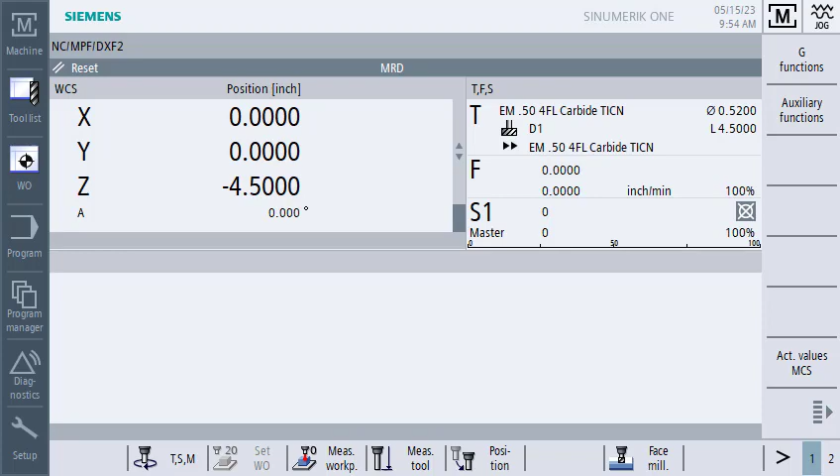Okay, let's program this part from a DXF file. We'll go into our program manager. I've already copied the DXF file in. So I want to create a new ShopMill program, and I'm just going to call this DXF. My block is already preset.

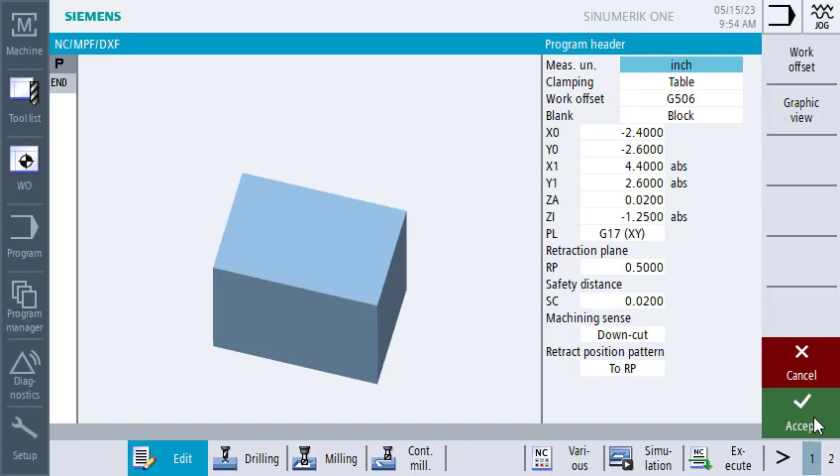So I'll go to contour mill. I need to describe the outer boundary, and I'll call that outer. You want to make sure that import from DXF is turned on. Here's my DXF file. This is my outer boundary. This is my origin, which is fine. I'll just leave it there.

So I'm going to select this element, and I have the center point called out, and I'll accept that. And now it wants to know which way to go. So I'm going to tell it to go this way in a counterclockwise rotation and accept that.

So now that I have an outer boundary, I need to describe what the physical part looks like itself. So I'll say new contour, that's the part, from that same DXF file. Now I'm going to pick this geometry and I want it to travel clockwise.

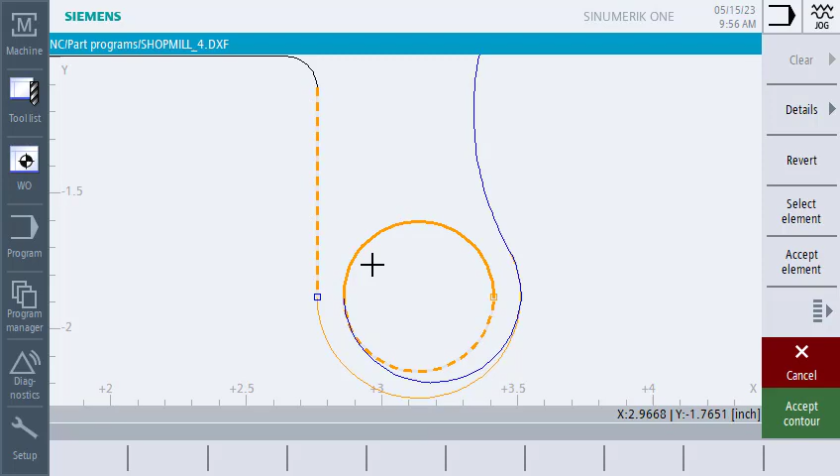Okay, so I'll pick this direction and you can see it stopped here. It doesn't know if I want to go here or here. That's the chaining tolerance. I'm going to tell it to go here. And you can see it walked all the way around. Accept that.

And now I need to do a spigot, which is already laid out with a 1/2 inch end mill. That spigot then will take the outer boundary and put the inner boundary in and take all of the material away from between the outer boundary and the part. I just have it on fast sim so we can get through this quickly.

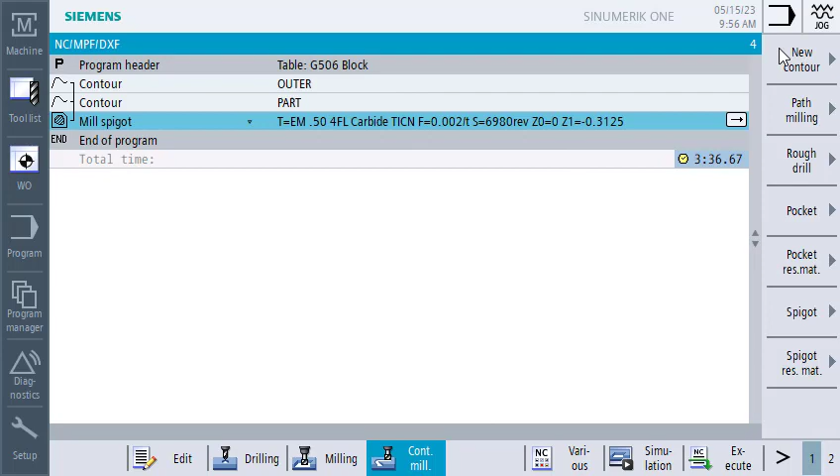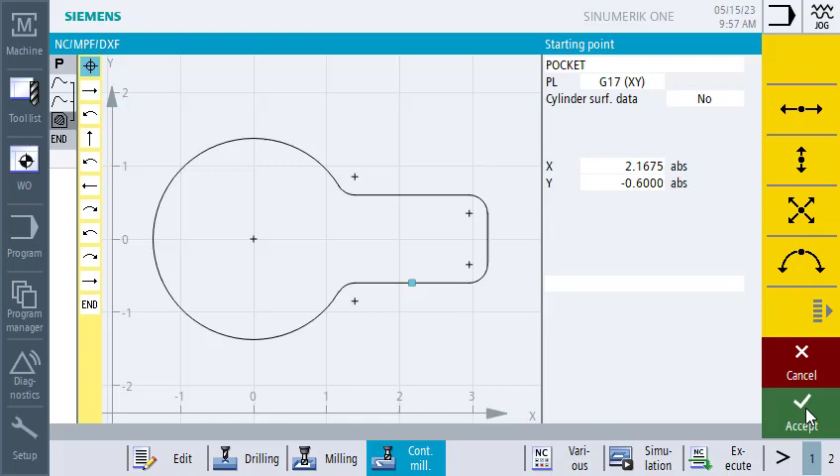So now I'll go back into edit and I'll say I want to do a new contour mill, and I'll call this the pocket. From that DXF, I'm going to select this element, and I want this pocket to go counterclockwise, and I'll accept that. And now I need to do a pocket with that same 1/2 inch end mill. I'll accept that.

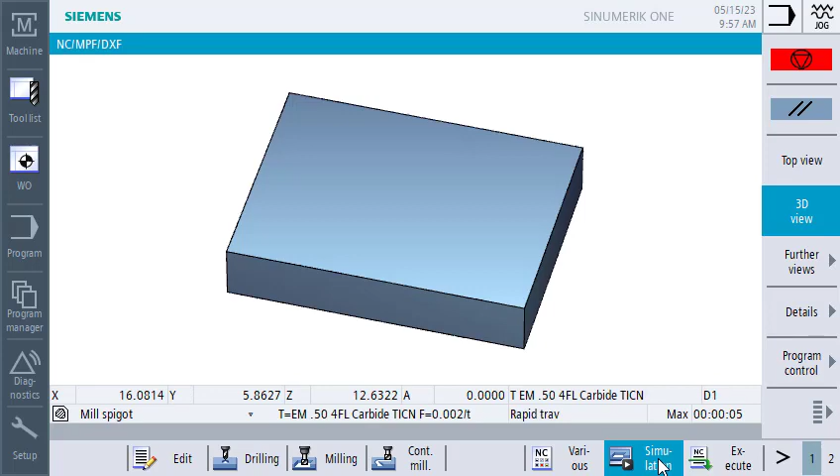Now I want to do a pocket of residual as well. So I had a 1/2 inch end mill to rough it, and I'm going to rest mill it with the 1/4 inch cutter. Okay, everything's looking good there.

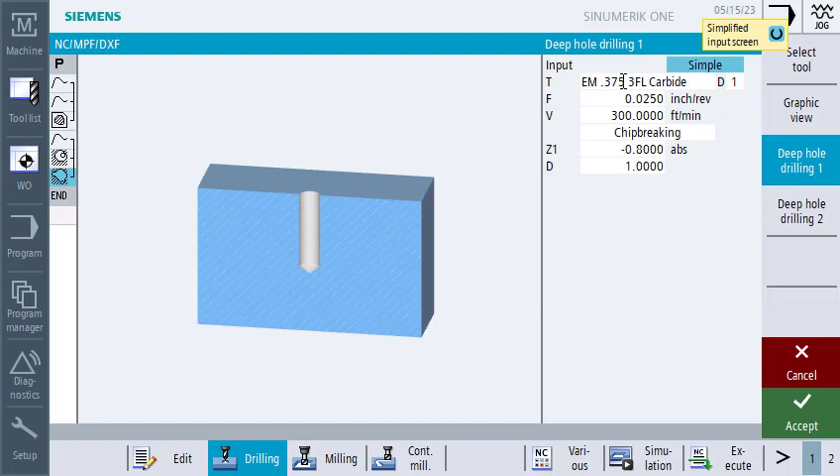Now what I need to do is put in my holes. So we'll go back into edit. We'll say drilling, and I'll do deep hole drilling. And I'm set up for the through hole, the 3/8 through hole. And now I need to tell it where to drill. I'll say random positions. And I'm just going to clear all this out so you can see it happen. And I want to import this from DXF.

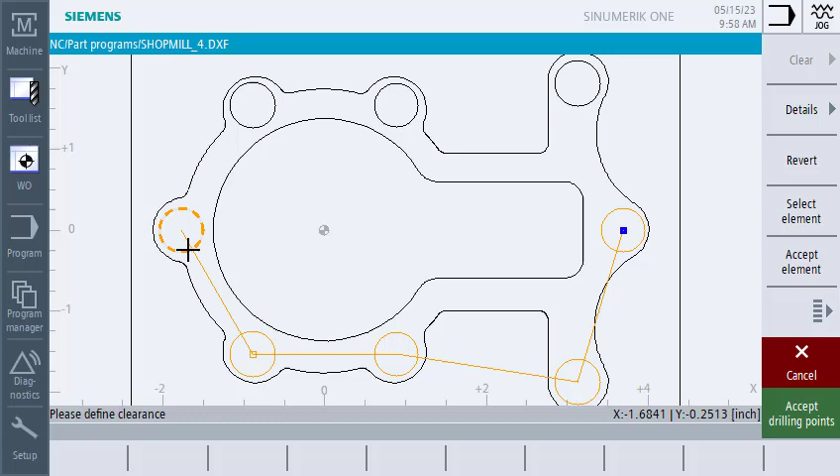That same DXF file. I'm going to pick this hole. And it's prompting me: do you want that one, that one, that one, and that one? I'll accept those. So now I have all of my positions. I've got my 3/8 holes done.

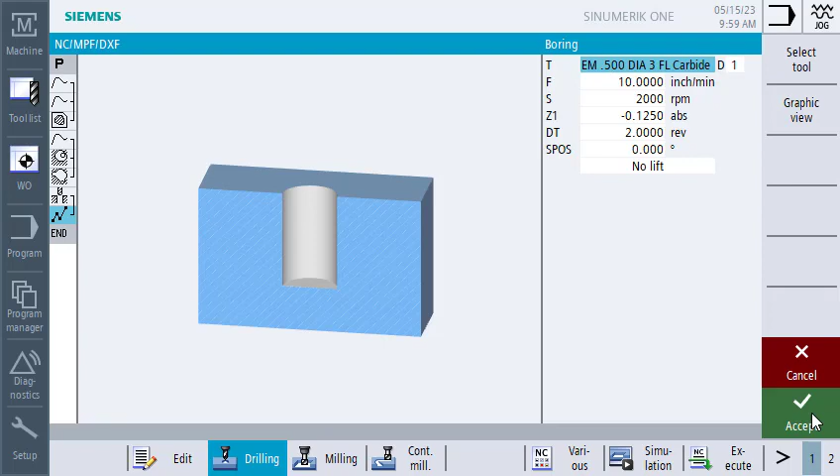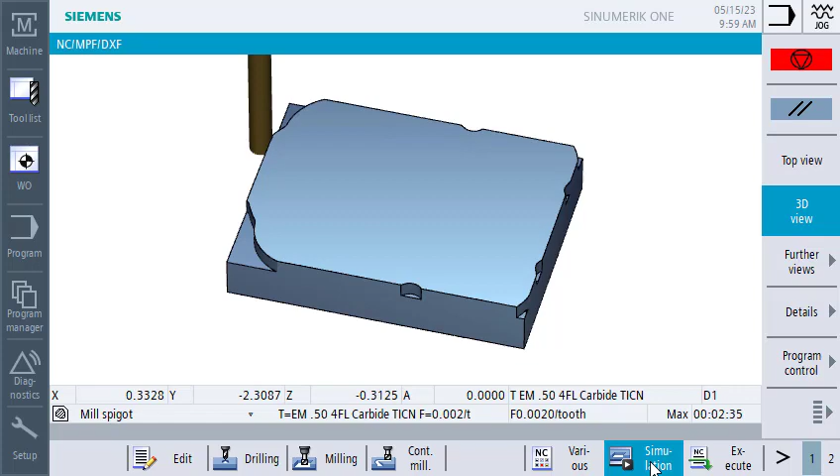What I need to do now, for the counterbores, I'm going to do that as a boring routine with a 1/2 inch end mill. These are all in the same position as these. So I'm going to copy these locations to here and paste it. And now I've got them all done. That's it. That's all there is to this.